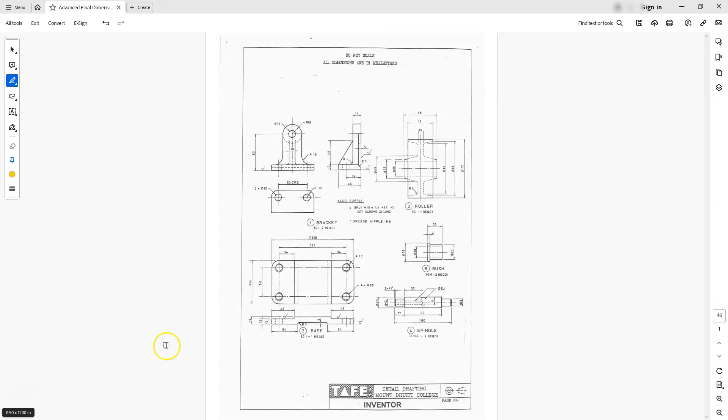Welcome back, we're going to keep continuing to create our parts for our trolley wheel assembly. In this video we're going to take a look at doing the spindle.

The spindle is located here. Let me center this up a little bit. As you can see, we're going to use the revolve command. Although you can use some other ones, the revolve will be really quick. You can also see that we have a channel going through here that we're going to create with some holes. Alright, let's switch over to Inventor and get started.

Remember that these are all created in millimeters. So the first thing I'm going to do is hit the new button here. It should bring open a dialog box that's going to allow you to select what type of units you want to use. By default, or if this is the first time you use Inventor, it'll typically look like this, but if you just expand the folder, go to metric, and we're going to use the standard millimeter IPT.

Once you double click on that, or single click and hit the create button like I just did, give it a little bit and you'll start seeing Inventor load up. It usually takes no more than 15 to 20 seconds.

Once it's loaded, remember we got to start off by creating a sketch. I'm going to do that by selecting this top icon, which tells me that I'm going to start a 2D sketch. So long as these words say start 2D sketch, just go ahead and click on the top icon there.

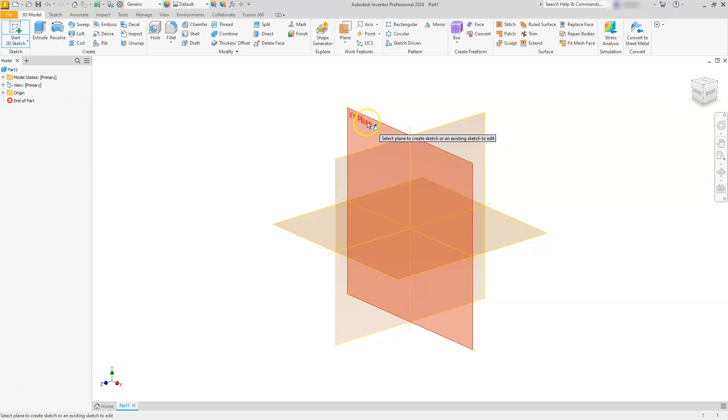Now it's asking me to select the plane that I want to work on. I'm going to use the XY plane in this case. You're going to see Inventor roll around. It should give me a center dot here, and then my ribbon at the top should change.

Here what we're going to do is start off by creating this line that's measured at 100, and from that you're going to see me build up and create some of these sides. The first line you're going to see me create is going to be 100. Remember that when you're doing the revolve command, think about doing only half of the shape that you're going to need. So as you see me do this, like the roller, you'll see how that looks when you just create half of this and then revolve it.

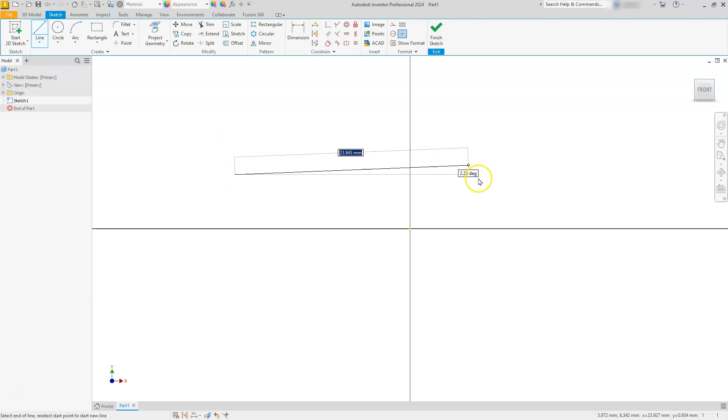I'm going to start with the line command, and like I said before, I'm going to create this line. Once I get it horizontal, I'll type in the distance that I want, and it's going to be 100. I like to usually hit the escape button and zoom out a little bit.

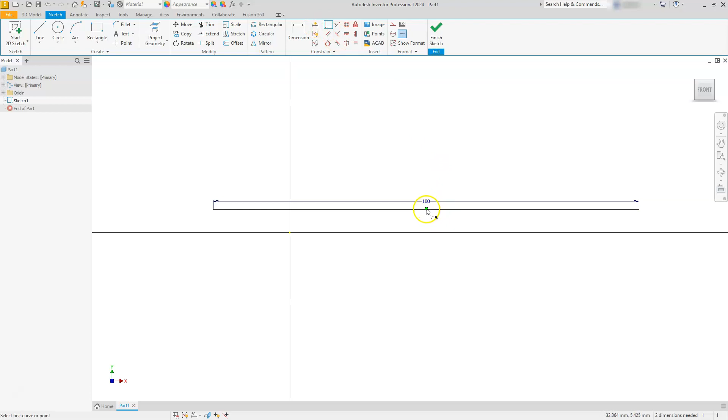Now I want to put the center of this horizontal line on the center point here. So I'm going to use the coincident constraint, find the midpoint, select the green dot, and then select the yellow dot.

Next thing I'm going to do is turn this line here into a center line. Go ahead and select that line, choose the center line option. Then with the rest of this, we're just going to create these other lines and shapes, and then we'll start putting the dimensions on.

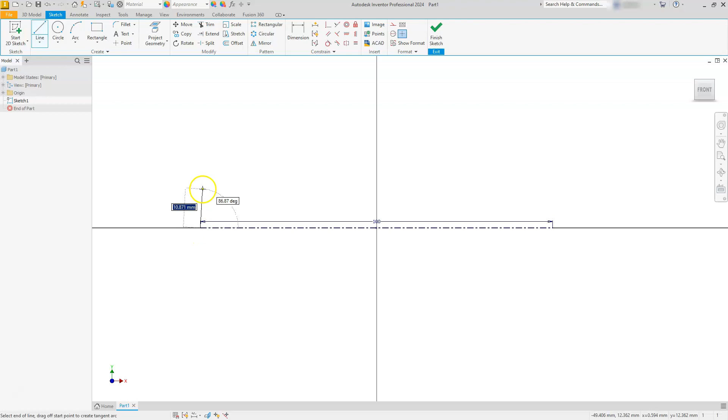So I'm going to go line, and I'm kind of freehand sketching this. If you want to be accurate with it, you can, but I need to put diameter dimensions on this, so I'm just going to freehand sketch it. I know it looks like this, and it creates this shape here.

Finally, when it lines up there, I'll go ahead and click it. I know that this side and this side should be horizontal or collinear to each other, and I'm getting that information from here. It's telling me that each one of these diameters have a diameter of 12, so therefore these lines must be collinear to each other. Also, I'm going to set this distance of 17 and 66.

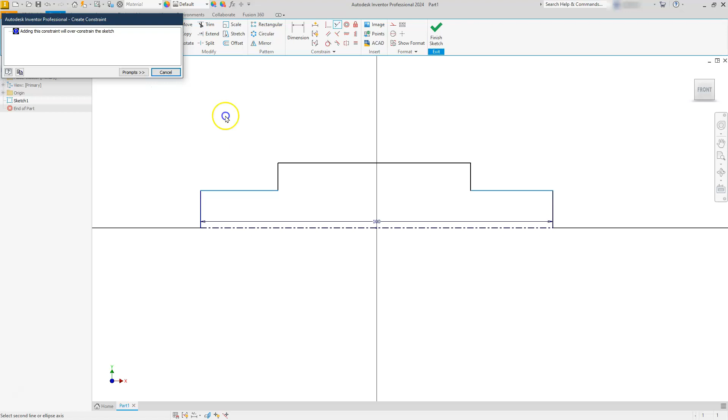So the first thing I'm going to do is set these two lines collinear to each other. I'm going to choose the collinear constraint, select this line and then select this line. Now you can see that it's telling me that it's over constrained, which is a very good thing in this case. That means that when I line those up, it automatically put those there for me. So I'm happy with that. That's a good way of just verifying it.

Next, let's go ahead and put the dimensions on here. I'll go to the dimension, select my center line — it doesn't matter which order you select these in — and then I'll select this line, and come and place the dimension. Type in 12, enter. Do the same with this one.

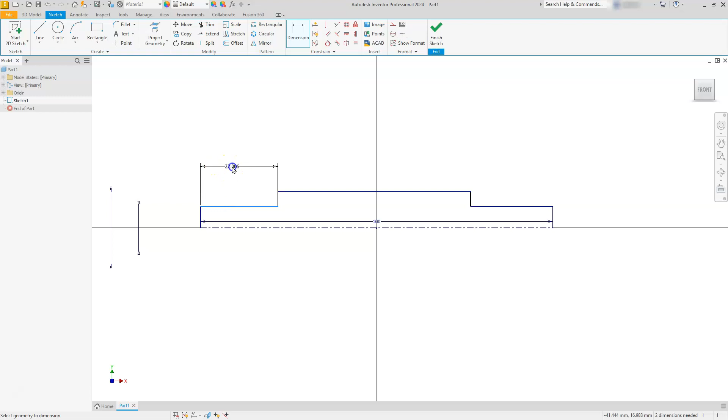So I'm going to select this line, and then my center line. I'm going to place the dimension, and this one will be 20. Go back to the dimension. I'm going to place this dimension at 17, and then this dimension is 66.

All right, if I look down at the bottom right, I see that my shape is fully constrained. Let's go ahead and finish the sketch.

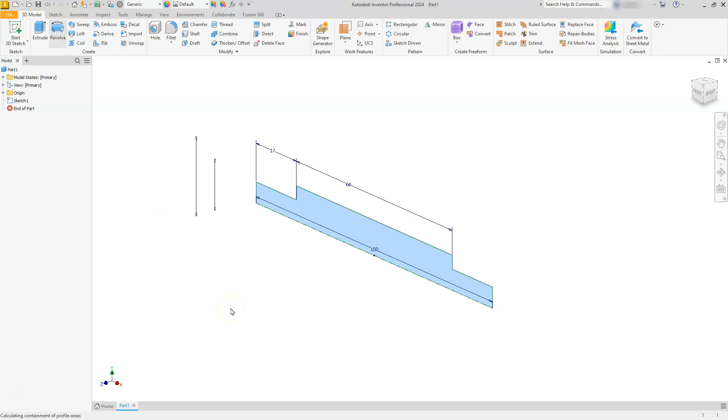Zoom out just a hair. Revolve. It should automatically pick up everything that I need to revolve this, since I only have one axis, and then I have the shape. So it went ahead and created my shape that I needed. I'll go ahead and hit OK.

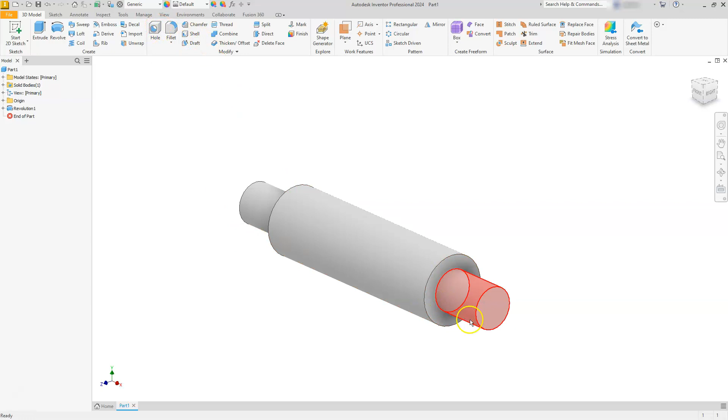Next, I'm going to go ahead and put the hole that's running through the middle of this. I'll save the chamfers for last, so I'll just go and do the hole. I don't need to put a sketch there and make a center point, although you could and it wouldn't hurt. But I'm just going to use the hole command.

Select this face. And then I need to give it a concentric reference, which is going to be that circle. Alright, so now I need to give it its size. Right now it's reading that the size of this thing, let me go ahead and turn it back on a regular hole, I'm sorry. So I'm going to just use a regular hole.

The diameter of my hole, it tells me on the drawing that it is 5.1. So you can see that I have that. And it also gives me a distance of how far that hole is. If we do a little simple math of this, we should be able to figure out that that distance should be 50. Alright, so I'm going to tell it that I need to give it a distance. I'm going to give it the distance, which is going to be 50.

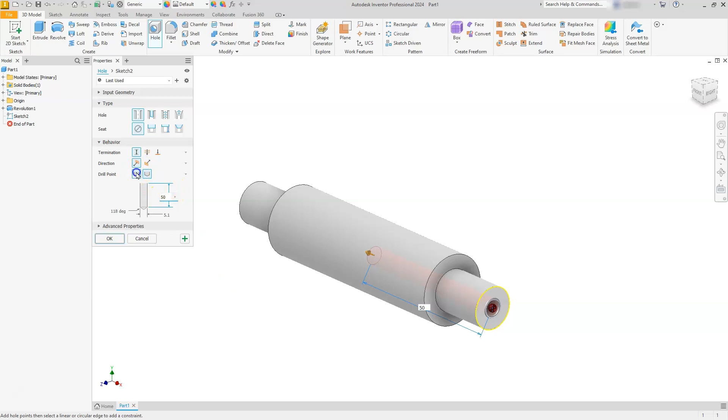And now it's asking me, do I need the drill point or do I need it flat at the bottom? In this case, it really doesn't matter, the other hole should cover it up. So let's just go ahead and make this one flat. Hit OK. And now I need to drill a hole going through the top of this.

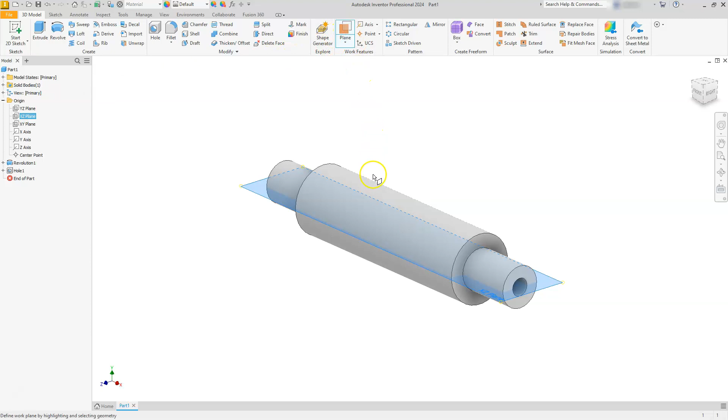So the way that I'm going to do this is that I need to set up a work plane for it. I'm going to choose origin. And then I'm going to find a plane that I want to be parallel to it. So I'm going to select the XZ plane. I'm going to select the work plane. And then I'm going to select just the top of my cylinder. Once you have that, go ahead and select the yellow line that's on my plane here.

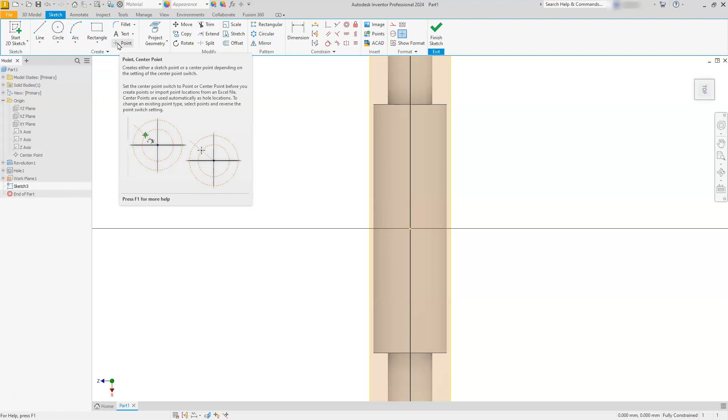Then I'm going to select the create sketch constraint, or option, I should say. Next, I'll choose the point. Select my yellow dot here. Finish sketch.

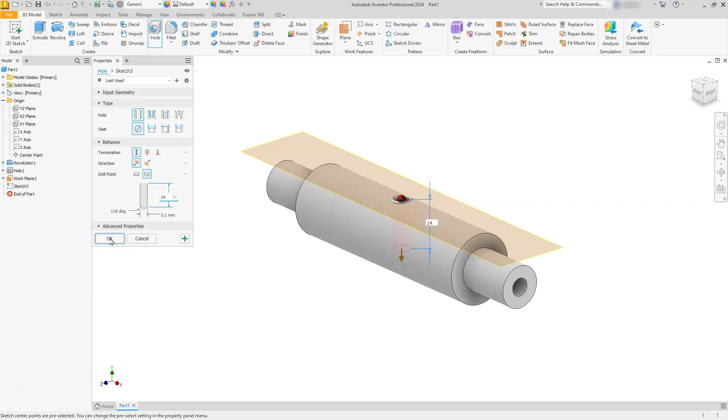Let's go back to the hole command. And once I do this, it should automatically pick the hole, and it's assuming that I want to do the exact same hole that I did the last time. But in this case, we do have the length that we need to do, it's going to be 14. And this one also has a drill point at the bottom of it. So when I switch back to the PDF and show you this, you should be able to see it. Alright, I'll go ahead and hit OK.

Let's go ahead and take a look at this from the front side. I'm going to turn this plane off. One quick way of doing that is selecting this yellow line, do a right click, and then select the word visibility, and it should turn it off.

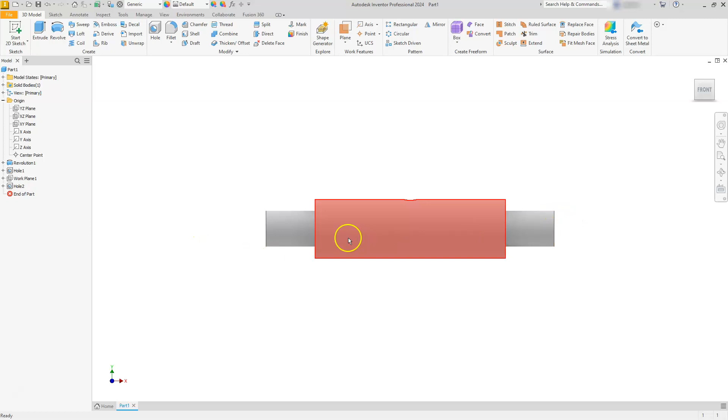Another thing I want to do is I want to be able to take a look and see through this and see if it did exactly what I want. So I'm going to go to the view option here. And then underneath my visual styles, right now it says shaded with edges. So if I go ahead and make it something like a wireframe or some of that nature, I can take a look and see that that is indeed what I created here.

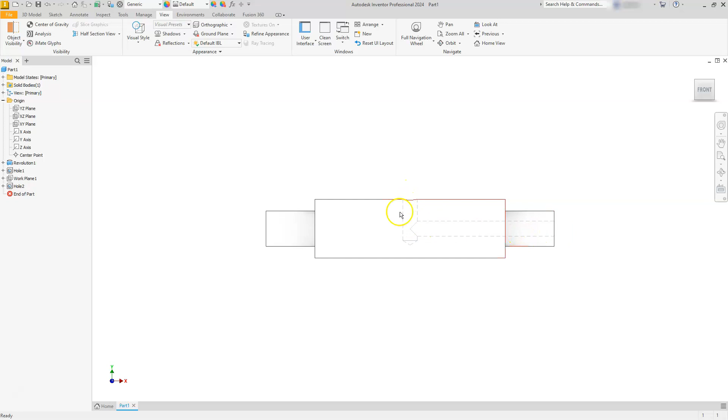I'm going to go ahead and put that back on shaded with edges. Let's go back to the 3D modeling tab. And then we'll do the finishing one on this one. So let's go ahead and choose chamfer.

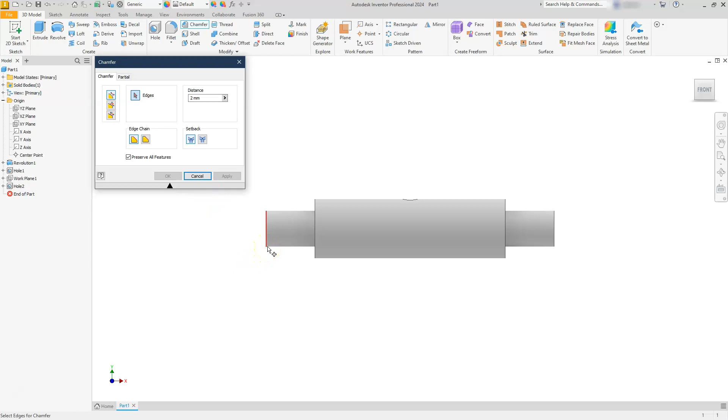My chamfer should be 2 millimeters. And that's going to be right. And it's reading it as 45 degrees. And according to the PDF, that's what it is. So I'm going to go click that edge and then this edge and hit OK.

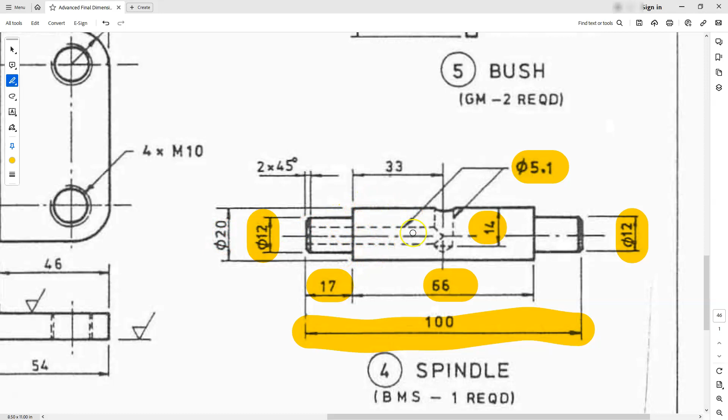Alright, so kind of looking back at everything, you can see where I got some of these numbers from. When I wanted to go down, that number of 14 is sitting here. Both of those hole sizes I did get from 5.1. And then this overall diameter of my larger cylinder here was indeed 20. The way that I came up with the 50 was from coming from this edge is I added the 17 plus the 33. That gave me my 50. And then finally, I have this chamfer on both edges.

Alright, so that should be everything that I needed to complete the spindle. And I got all of my dimensions accounted for.

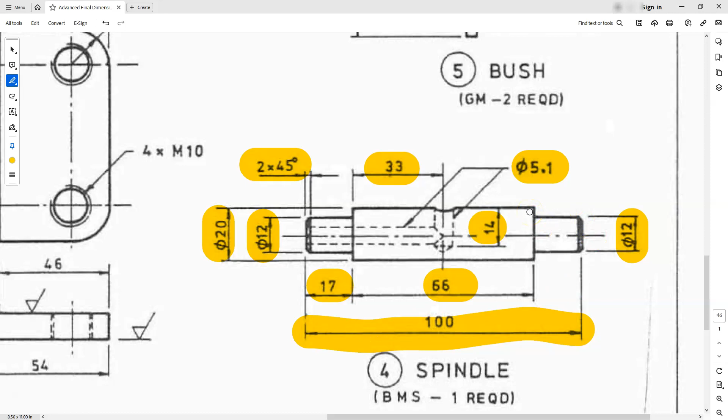Alright, so one of the last things I like to do is put this in an isometric. Let's go ahead and make sure we save this one. And we're going to call it the spindle. And this one is complete.